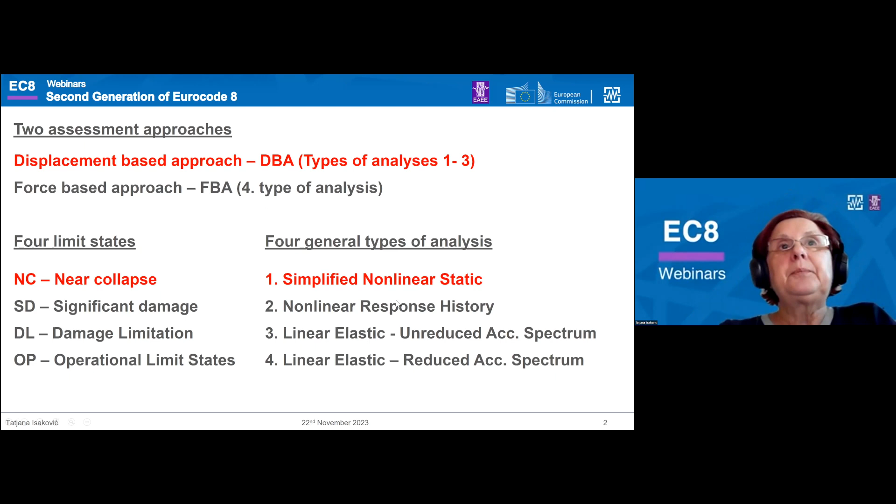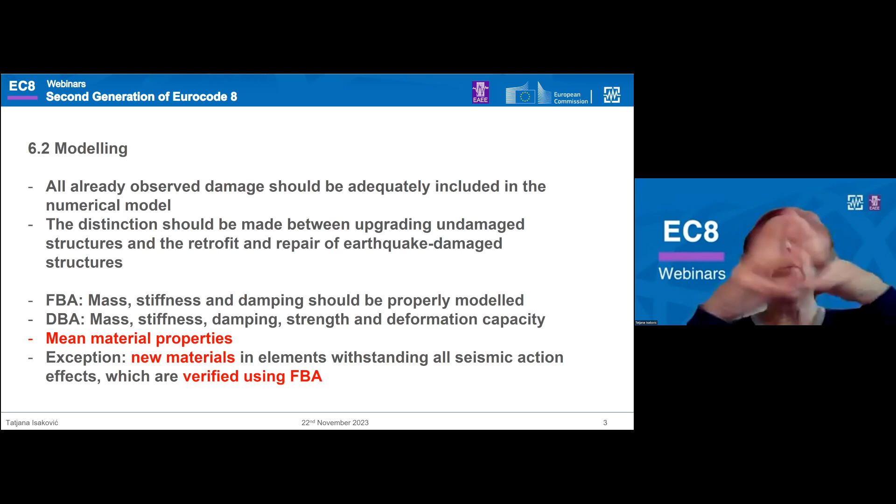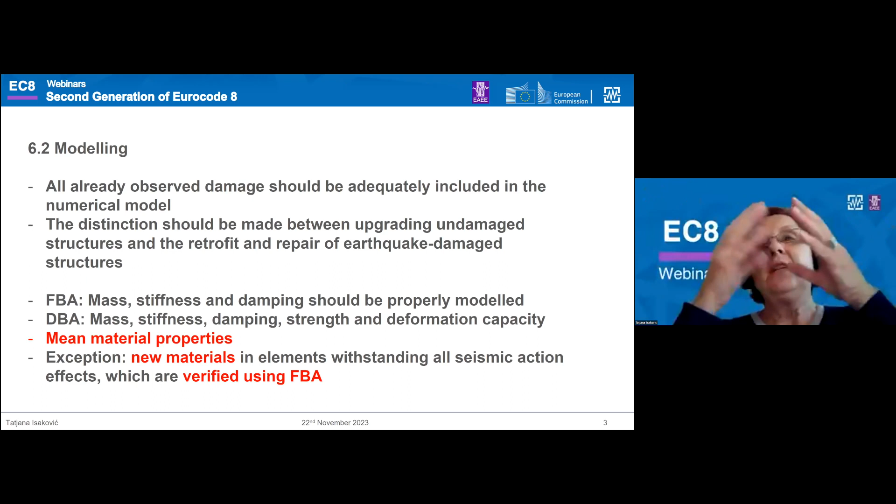Let's go to the modeling. When we prepare the model, first we have to check if our structure is already damaged or undamaged. I will show later that seismic action effects should be increased where the structure is damaged. A big change compared to the current version is that mean material properties are almost always used, with the exception Paula mentioned, which I will not explain again. This is a great simplification compared to the current version where different material properties were used.

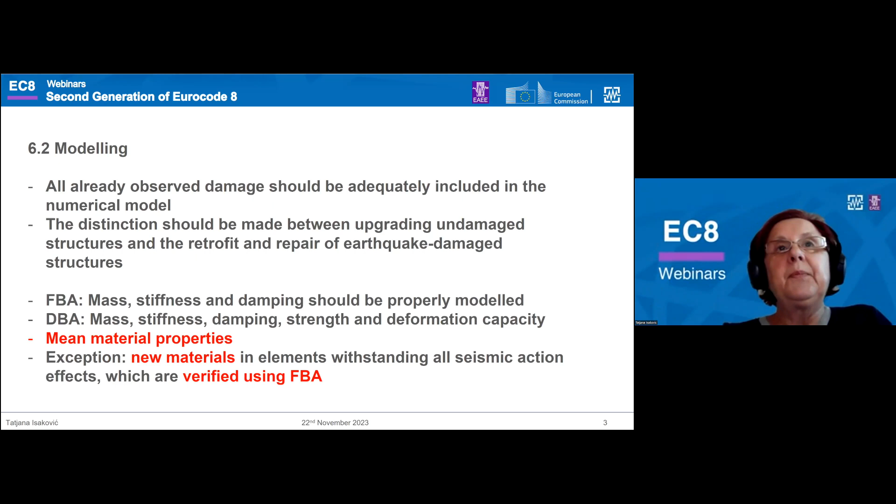What we should model is, of course, mass, stiffness, damping, and since the displacement-based approach and nonlinear analysis is preferred, also strength and deformation capacity. There were questions on how to do that - there are many possibilities. For example, one option is the simplest model, which uses lumped plasticity, but there are also other options.

If we perform response history analysis to describe how the model or elements respond, it depends on the type of response - whether ductile, brittle, or what is critical. One can ask, where can I find instructions to define these values? Here we have generalized forces and generalized deformations, which can be moments, rotations, or curvatures. These instructions can be found in part 1.1, chapter 7, for different types of materials.

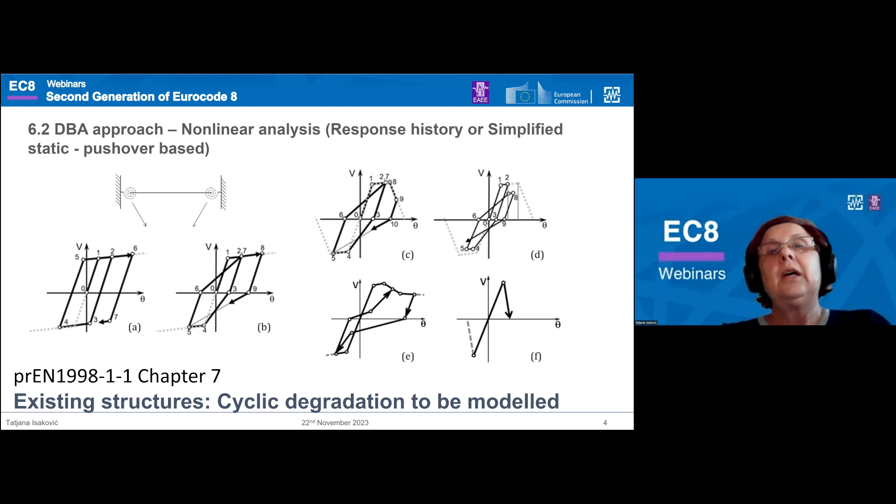What is expected in Eurocode 8-3, since we are dealing with existing structures, is that we also model degradation of strength. This is not necessary in all cases - it depends what we are doing. It is required when global verification is performed, which we will talk about later. Instructions can be found in part 1.1. These were in the past in Eurocode 8-3, but since they can also be used for new structures, they are now placed in this general part.

So these were models for nonlinear analysis. For pushover, of course, envelopes will be used. Eurocode 8-3 also allows a simplified displacement-based approach, meaning we can perform elastic analysis with unreduced spectrum. This is not a force-based approach - I have to stress this. Because we are dealing with unreduced seismic action, we have to check the displacement, the generalized displacement capacity. Here it's very important to properly model the elastic stiffness, which should be the elastic secant effective stiffness corresponding to the elastic limit state.

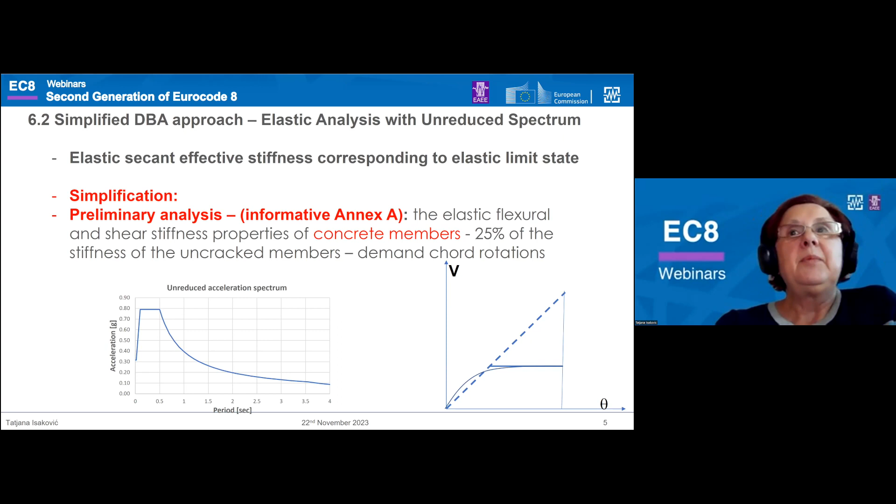For example, in concrete structures, this is the stiffness corresponding to first yielding. But some simplifications are also allowed. Paula already mentioned preliminary analysis, where it's written that 1/4 of the gross cross-section properties can be used, since we're dealing with near collapse states and nonlinear response. The force-based approach, as Professor Kappos already mentioned, is allowed because designers requested it. But in this case too, elastic stiffness should be properly modeled, and some simplifications are available in the relevant parts for buildings and bridges.

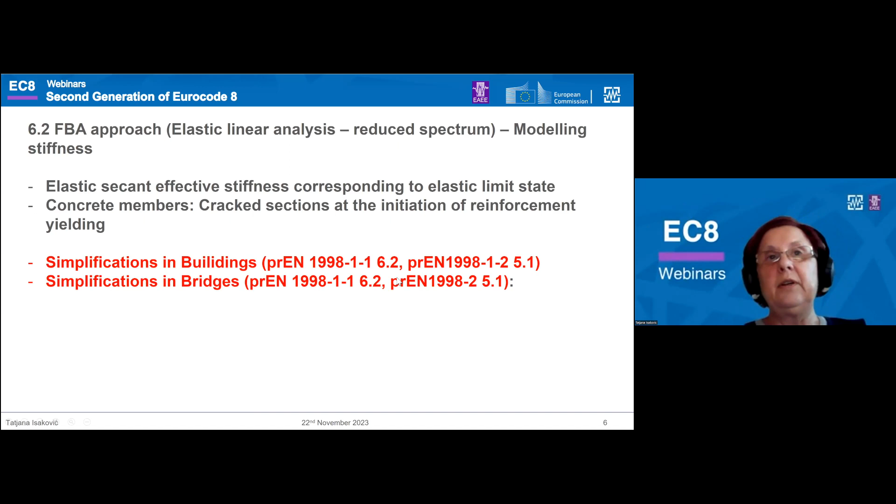Let's go to the nonlinear analysis. As I said, the nonlinear static analysis is preferred.

Here, there are not a lot of changes regarding the current versions. Everything is regulated in this general part of Eurocode 8 and parts for buildings and new buildings and bridges.

But what is probably changed comparing to the current version is that only one distribution of lateral load is required, proportional to the fundamental mode of vibration. This is written in the first part.

But for some existing structures, additional analyses are required. For example, if we have a soft story in a building, then uniform distribution pattern should be also taken into account, and some other requirements for masonry buildings are also here in Eurocode 8-3 required.

Of course, the corrections due to torsion and higher modes, which are described here in these two parts for buildings and bridges, should be performed too.

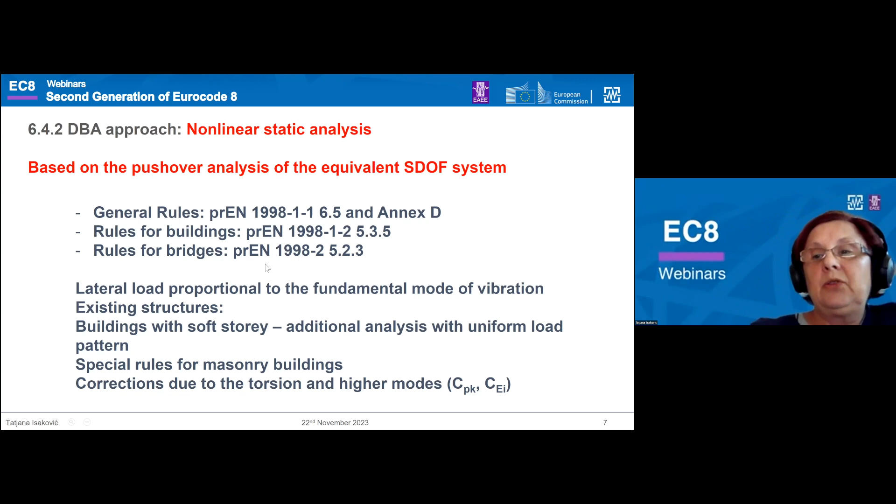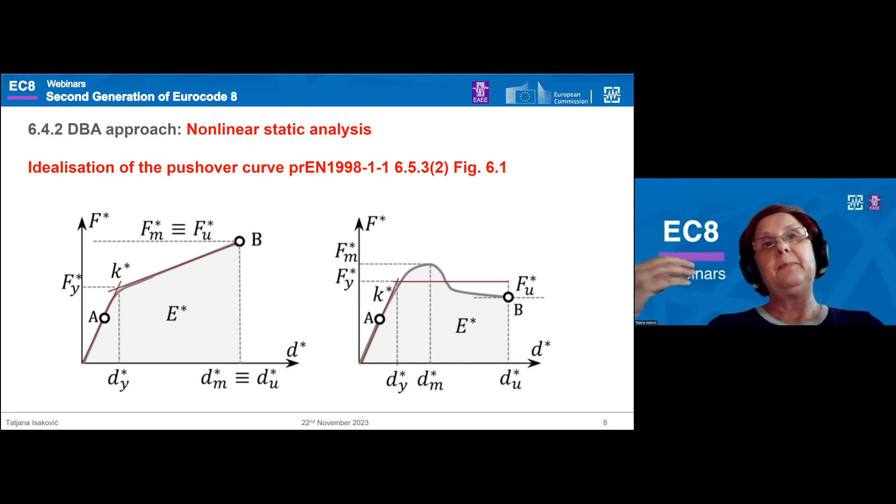What is also probably new for nonlinear static analysis, it is not directly included in Eurocode 8.3, is that different shapes of pushover curves are now addressed, and also different kinds of idealization. It is not only elastic, perfectly plastic, but here you can see this is, for example, some typical pushover curve for bridges in the transverse direction supported at the abutments.

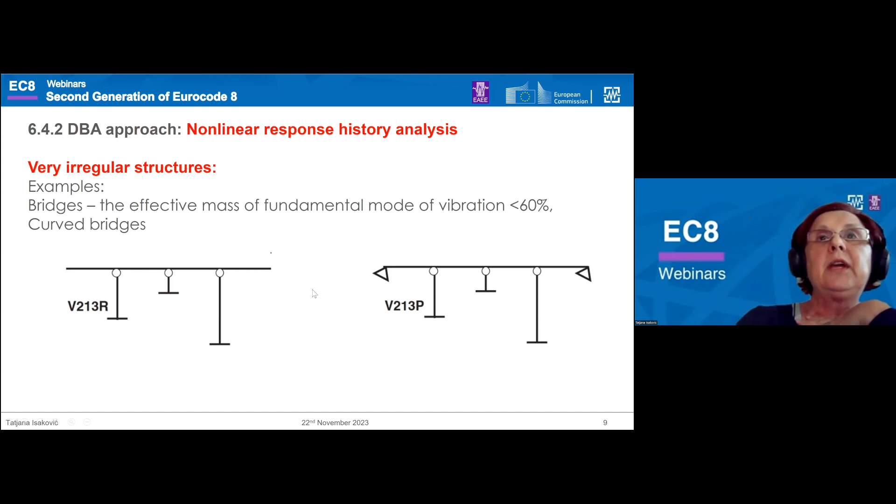And in such cases, the loading is defined again in a general part of Eurocode 8 in Annex D, how the accelerograms should be chosen.

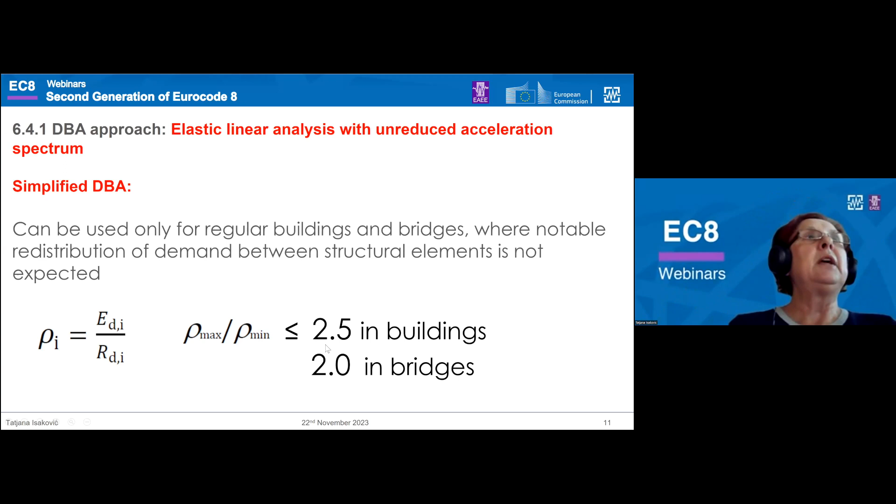If there is a large difference in these different elements, then this method cannot be used, because in such case a significant redistribution between members can be expected if these values are larger than these limit values, and elastic analysis cannot address this.

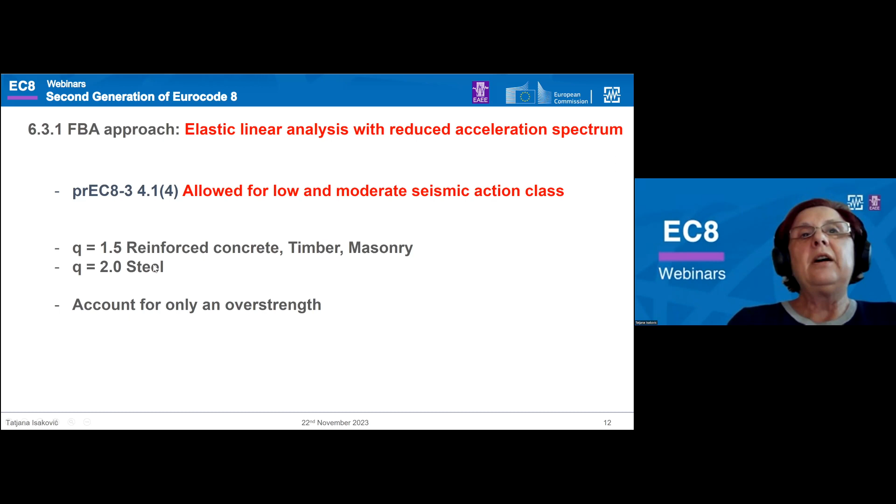Force-based approach, the use as limited is allowed in low and moderate seismic regions. As already was mentioned, Q factors are lower, 1.5 or 2 for steel. And here only the overstrength is taken into account.

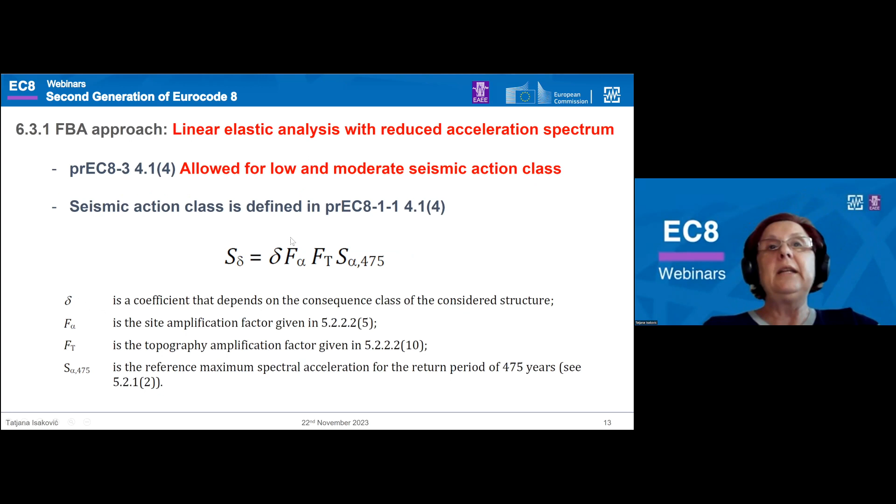How the low and moderate seismic action is defined: it is defined again in a general part, but using this maximum acceleration in spectrum, but for return period 475 years. I think personally this should be harmonized with the near collapse limit states where the return period is larger.

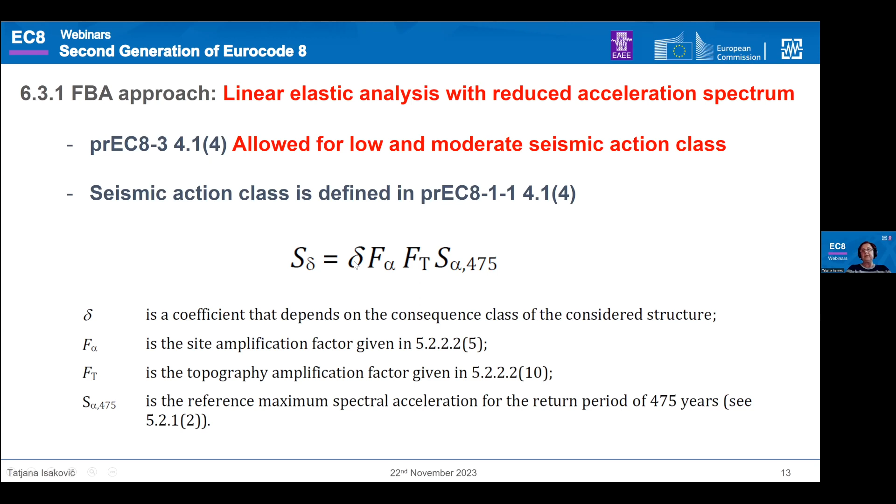Then there are topography coefficient, the type of soil, and parameter delta depending on the consequence classes. Here I made some preliminary calculation.

What does it mean when we use this return period acceleration? PGA is about 0.2 G. The limit value, if it is larger than this, this approach cannot be used.

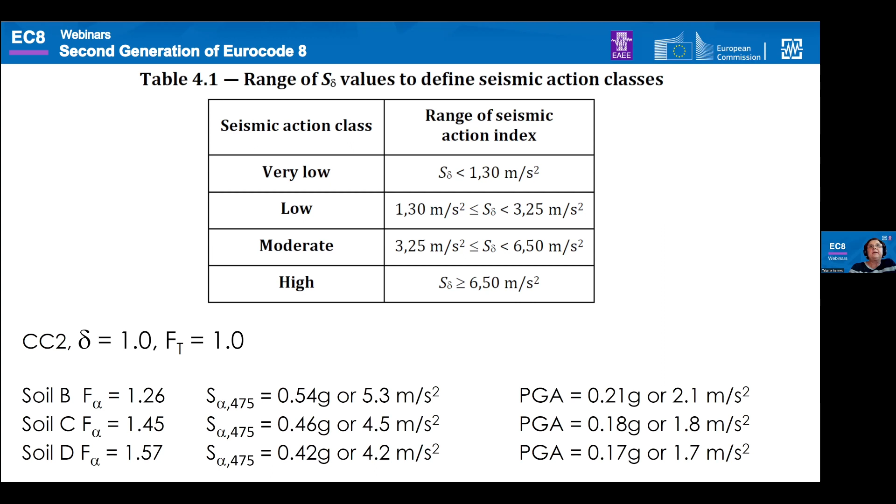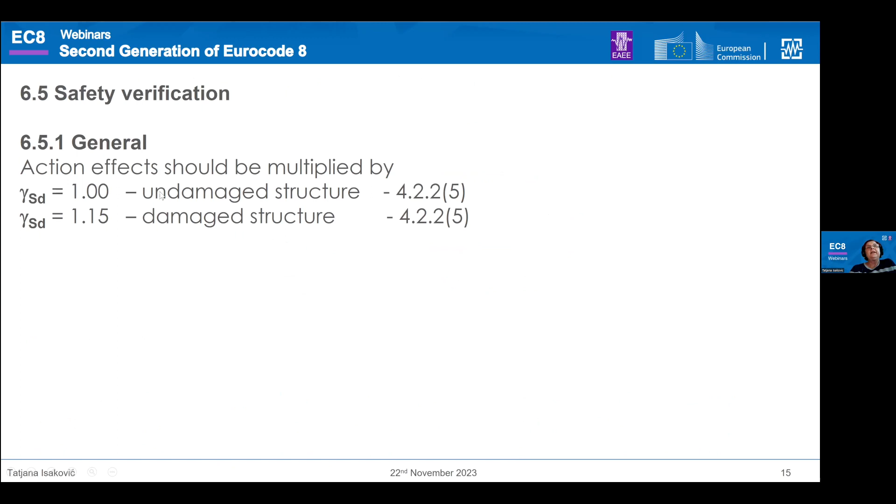And the last topic is safety verification. As I said, if we have an already damaged structure, the action effect should be multiplied by factor 1.15.

As was already mentioned in the previous presentation, the return period for the near collapse limit state is, let's say, default, preferred. The return period is larger, and the seismic action also.

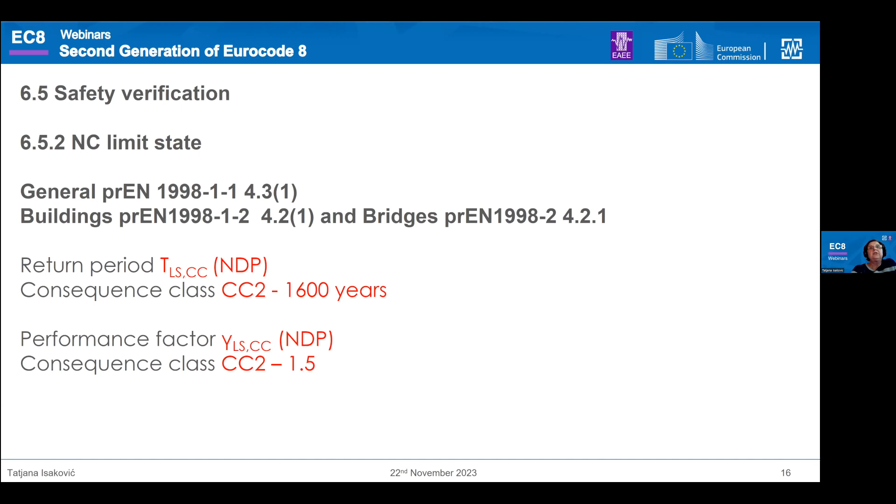And the verification can be performed in local and global terms. Here it is not decided, as Professor Kappos already mentioned, when the global terms can be performed.

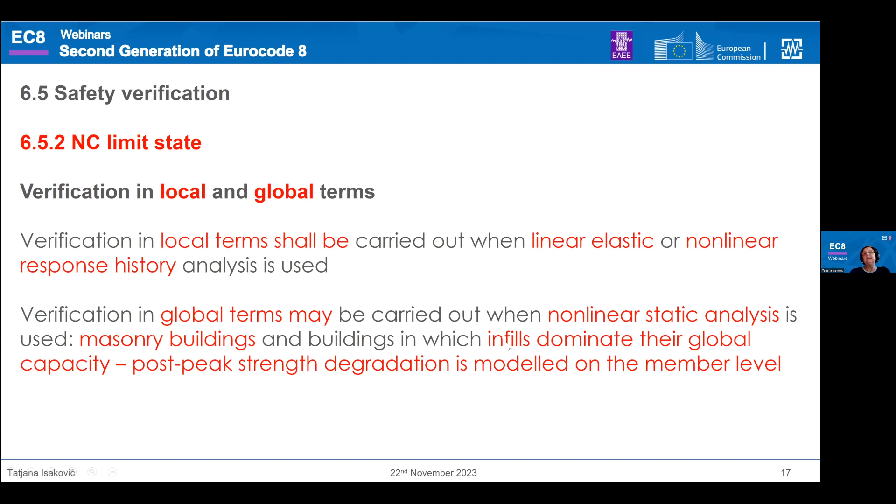But it is clear that it can be performed only when the nonlinear static analysis is performed. In other cases, local verification should be carried out. But in general, it is mentioned that the global verification will be carried out for masonry buildings and buildings where the infills dominate the response.

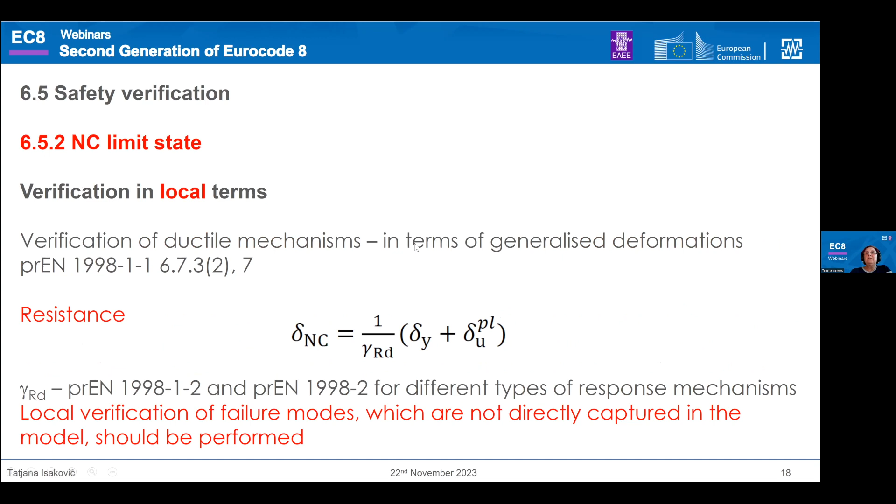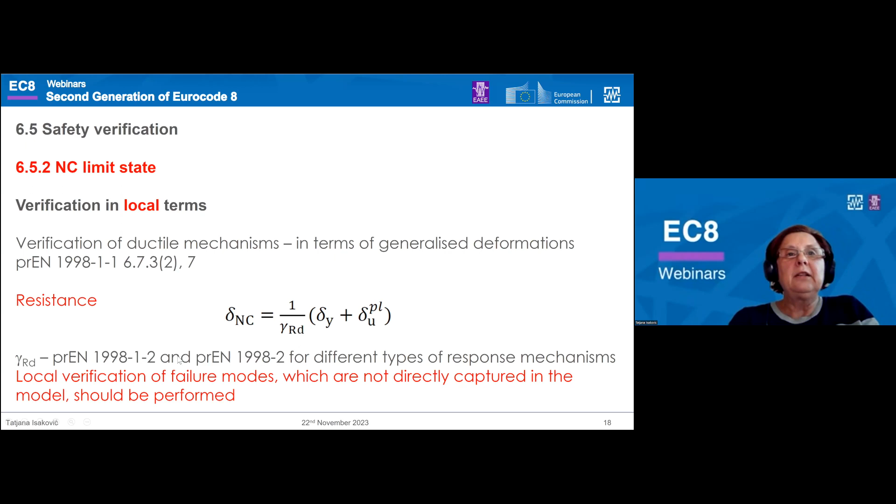When the verification is performed in local terms, then of course the generalized deformation should be compared with the resistance, which is defined in the same manner, taking into account the yield curvature and plastic part divided by the appropriate partial factors that Paul already talked about, and these factors can be found in other parts of Eurocode 8.

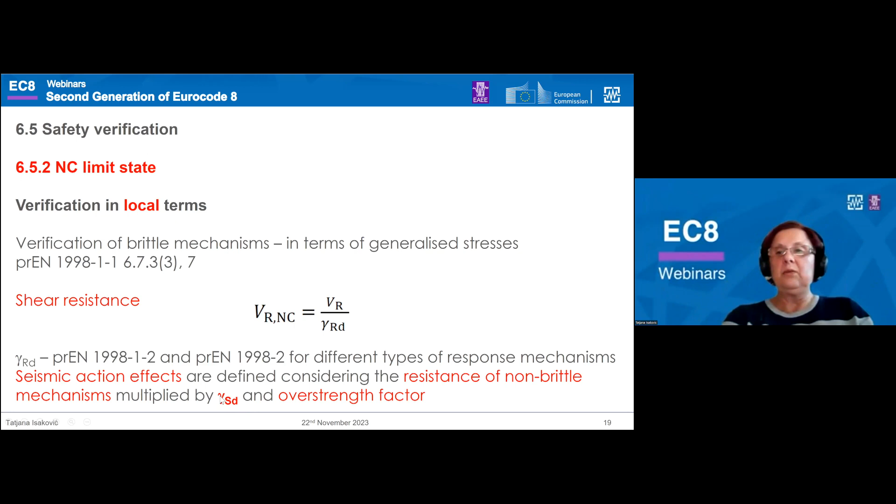If we're dealing with a brittle mechanism, then we have to check this in terms of generalized stresses. For example, shear resistance should be compared with shear forces, which have to be calculated out of the non-brittle mechanism in a similar manner to what we do with a capacity design approach.

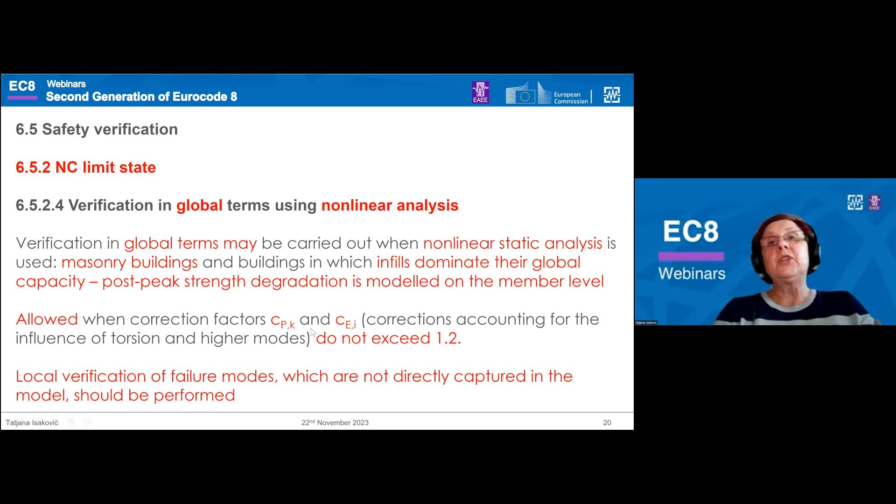And again, in global terms, it is mostly intended for masonry buildings and where the infills are predominant, but only if the influence of torsion and higher modes is not too large.

The other two are actually elastic limit states, and the damage limitation, the upper bound is yielding; operational limit states is regulated with other parts. Thank you very much.